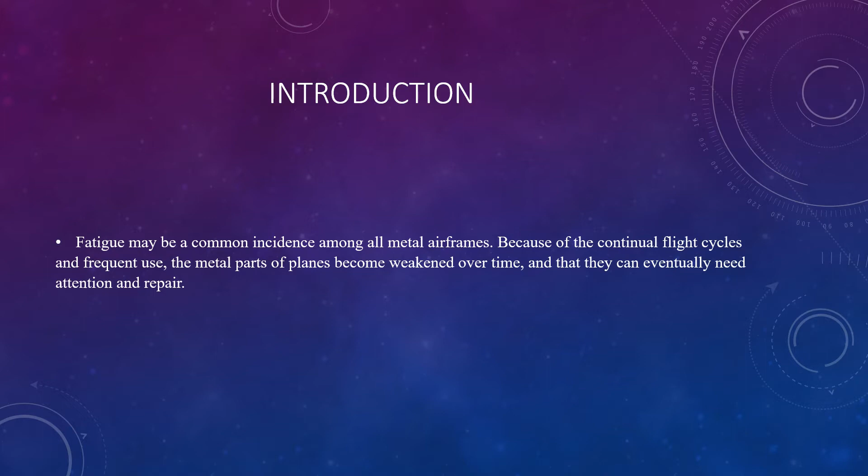An aircraft begins to age after its first flight, and aging becomes an issue when the aircraft can no longer be in maintenance. Next, we're going to talk about the discussion for this slide. The failure happens if metal is subjected to either multiple continual stress combined with stress relieving, or stress in opposite directions. For example, alternating compressions and tensions, continual bending in several directions and all. So in the slide I will show examples of material fracture in airlines and how to prevent fatigue failure, to understand the principle of fatigue failure on metal in the airline industry.

Next, I will talk about the types of material used to construct airplanes. First, wood was used in the design of the first aircraft. Wood is one material that has mechanical and physical properties that meet the factors needed for the manufacture of aircraft parts. This material possesses a high strength to weight ratio in laminate structures and is proof against adverse environmental conditions if it is first subjected to preservation treatment.

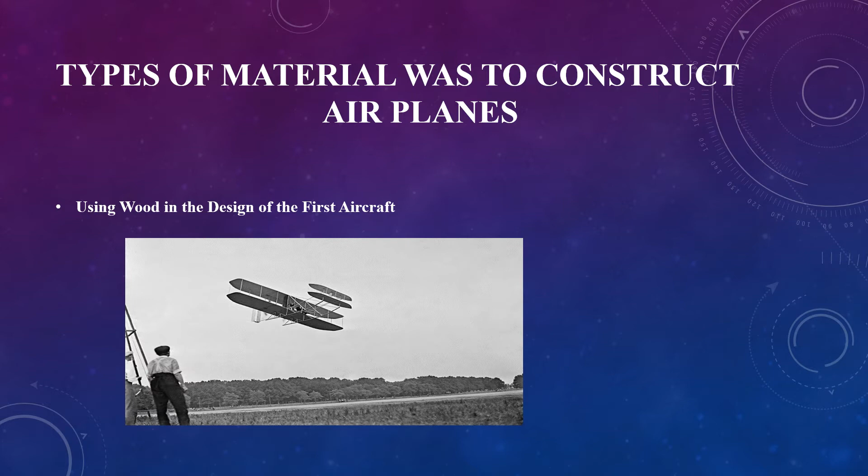Next, the introduction of metal in airlines. The metals used in the aircraft manufacturing industries include steel, aluminum, titanium and their alloys. Aluminum alloys are defined by having lower density values compared to steel alloys, with good corrosion resistance properties. However, steel alloys have a larger endurance, as well as a higher modulus of elasticity. As a result, steel is employed in the components of aircraft where strength is extremely important, like the landing gears. Titanium is utilized in the design of aircraft structures because it is a lightweight, strong, and corrosion resistant metal.

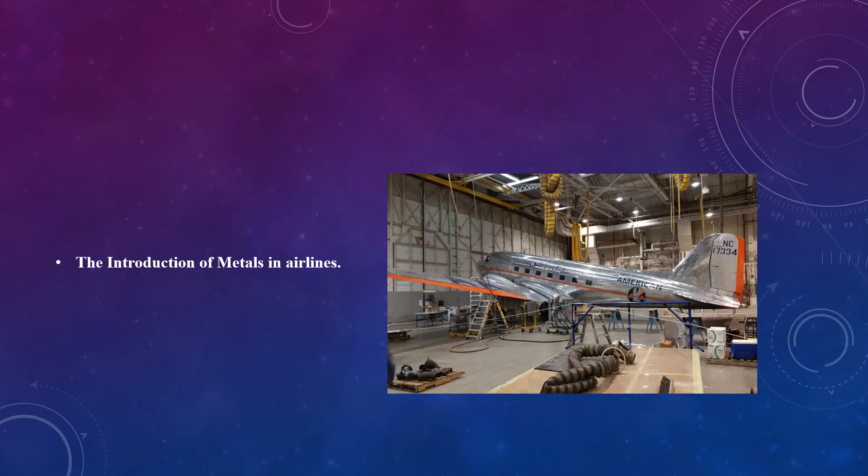Next, I will talk about material failure in aircraft. Fatigue failures have occurred in several components of airline structures. These failures have concerned different materials and various conditions of loading and surroundings. The failures typically begin at some local stress raiser like a bolt hole, a fillet, a flange, a rivet, or tool marks. So it will start over there. Cracks tend not only to start at a stress raiser, but also to propagate through others.

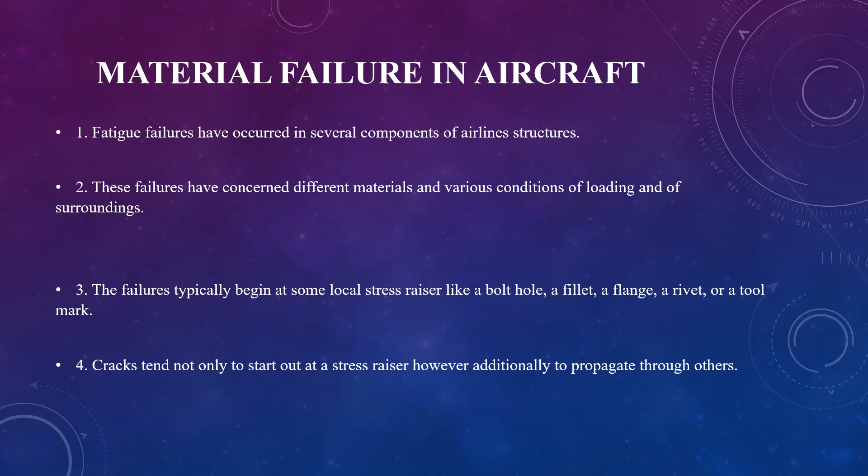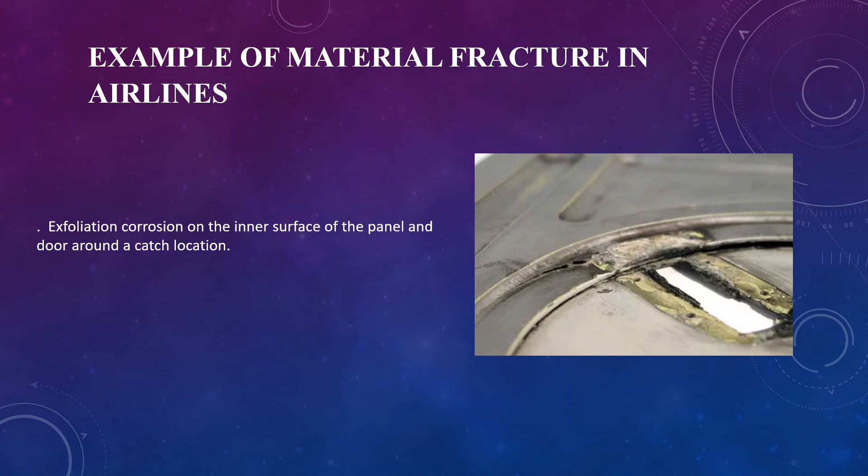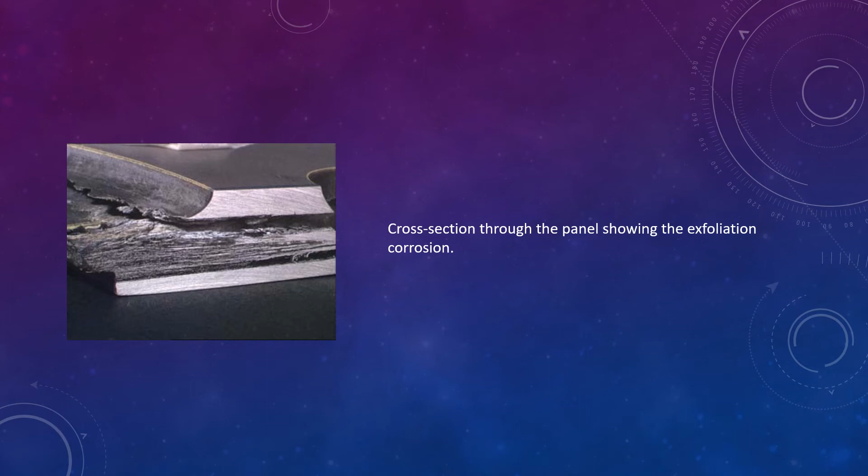So this is the example of material fractures in airlines. This picture is exfoliation corrosion on the inner surface of the panel and door around a catch location. The next picture shows a cross section through the panel showing the exfoliation corrosion. This picture is a landing gear. It is manufactured to absorb the loads arising from taxiing, takeoff and landing. Hard landing shock will be absorbed. Vibration is another to be absorbed. Fatigue cracks can form in the struts and trunnion arms as the result of these loads.

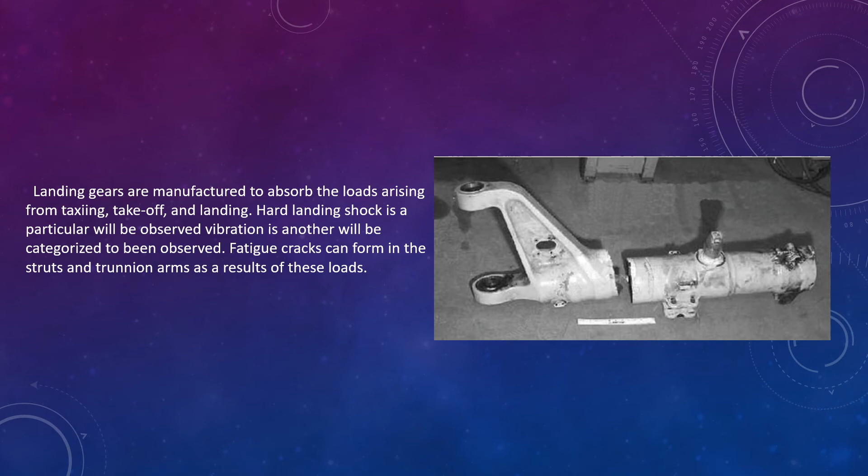So now I want to talk about how to prevent fatigue failure. One of the simple ways to prevent aircraft fatigue failure is through regular inspection. We need to inspect all of the parts in the aircraft. Catching visually or otherwise detectable problems earlier will make the distinction between maintenance, repair and failure.

Next, inspecting metal elements for inconsistency or damage without destroying the element. This testing may include the use of ultrasound, X-ray scattering, X-ray absorption, electric eddy current, magnetic particles, liquid penetrants, and optics. Ultrasound is a device where a high voltage electrical pulse is converted into high frequency ultrasonic energy. When an ultrasonic wave hits the defect, it bounces back, which enables the inspector to see the depth or true size of flaws under the surface.

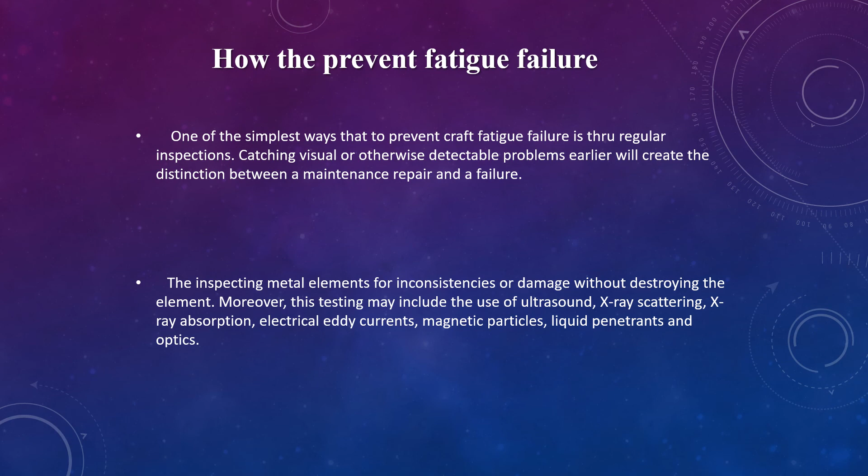Then the eddy current. In eddy current, a coil sends an electromagnetic field through a metal surface, producing a loop pattern. The defect will distort the pattern, which is captured and analyzed by a recording instrument. The technicians are then able to review the created pattern, seeing defects beneath the surface. Another method to prevent fatigue is keeping an aircraft surface polished. When we polish, the surface can fend off the effect of fatigue better than unpolished ones. It also may buff out any existing surface damage on the area.

So I'd like to talk about the conclusion of this slide. Airplane maintenance and repair processes are a significant part of the assembly and introduction of recent materials and structures. Fatigue is the most common cause of structural failure in the aircraft. For this reason, the service life of the components is described by flight hours and the components are substituted after certain periods. I mean, they will have certain years or a certain period to change the component in the aircraft by considering material fatigue limits.